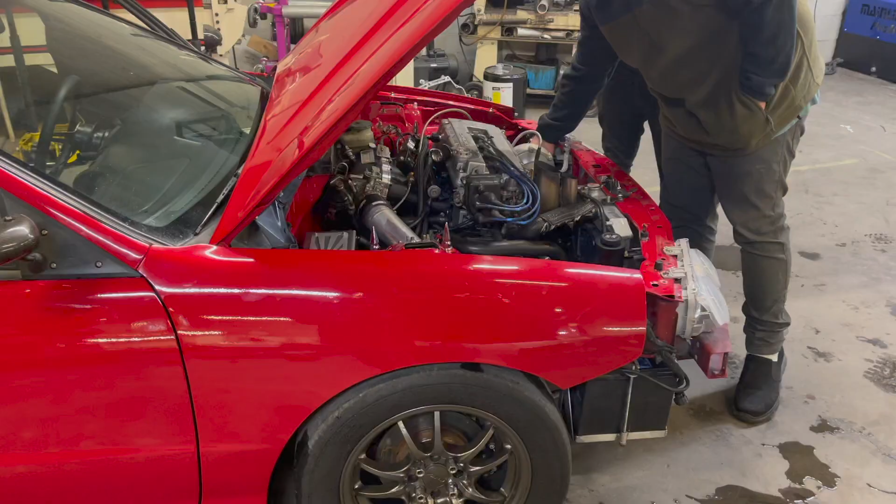All right, dog. All right, Joe. It's all good. It's all good.

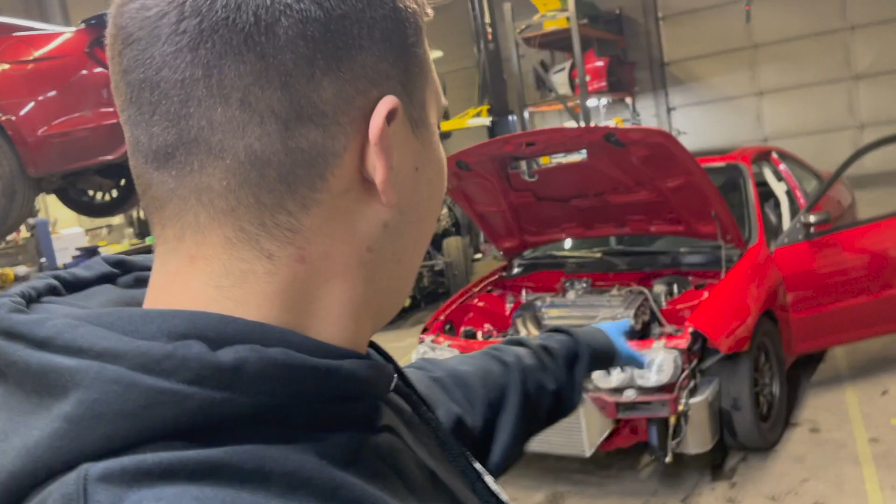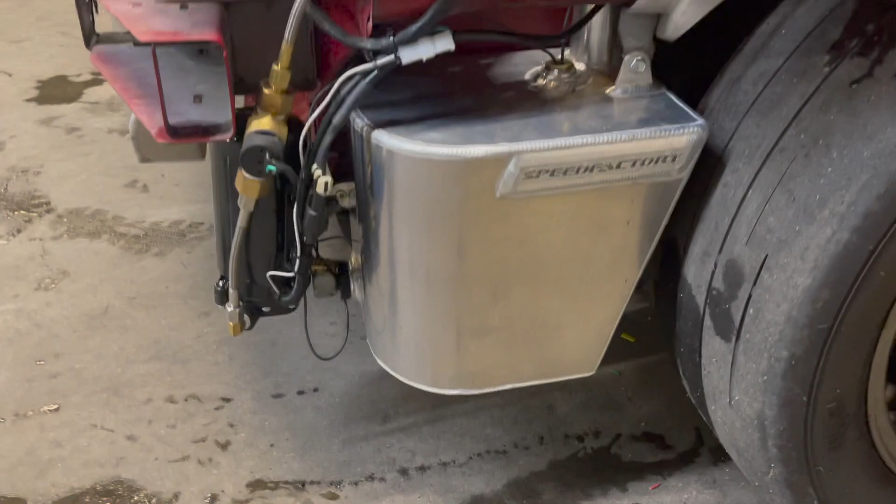Okay, cool. So, guys, welcome back. Today, we are going to be tuning this. Dan the man right there. We're going to give it all the sauce and see what she does. So, everything's working. I got everything just kind of installed on it right now. After the dyno session, I'm going to retuck everything, but for the most part, it's just easy access right now.

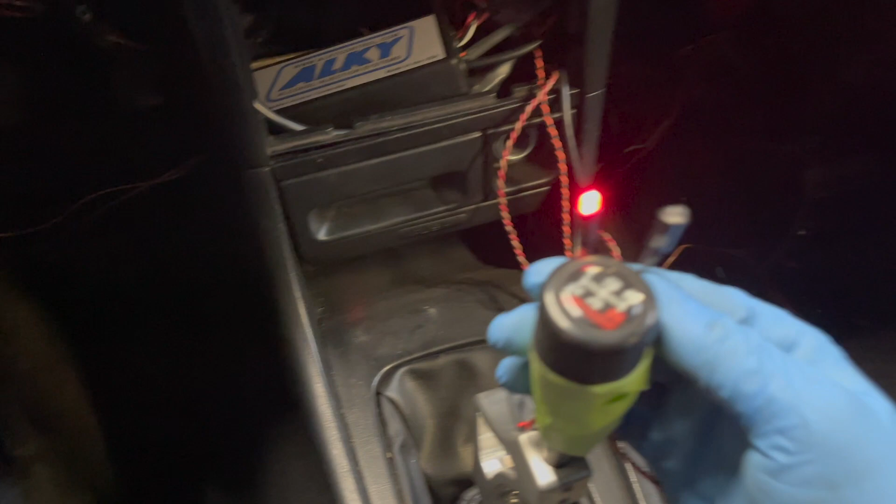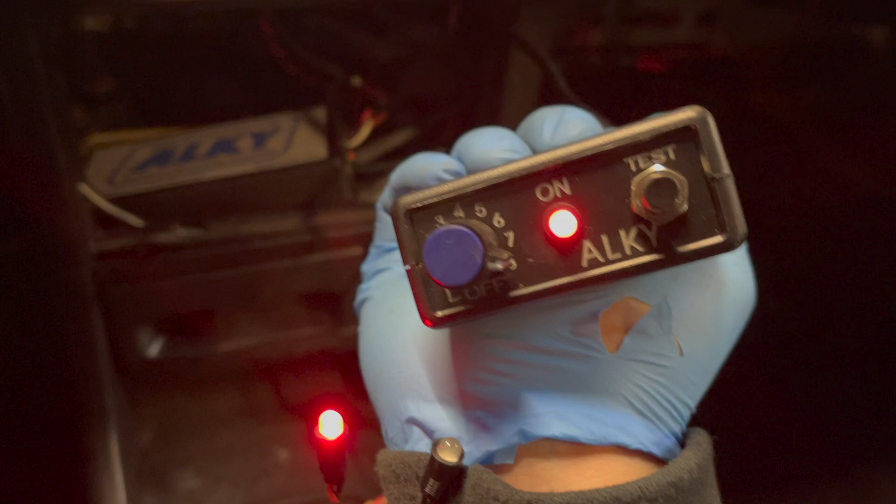So, kind of give you guys a quick little thing. This is the low level sensor light, and then this is the control module. So we have that cranked up to 8. We're gonna go full send. This is the test button to test the meth. It's on, it's armed. So yeah.

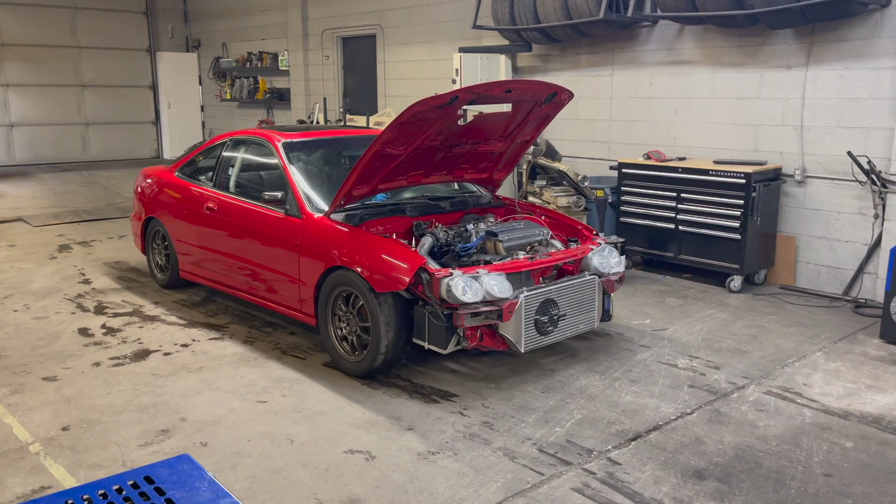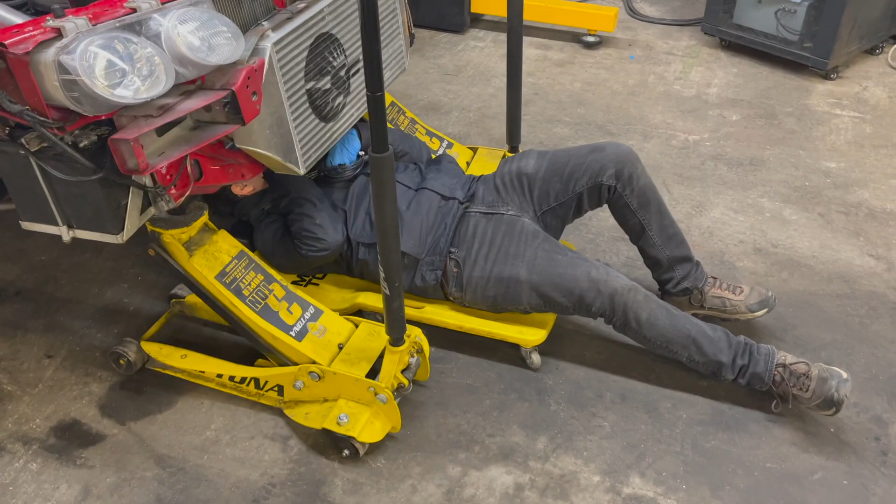So we're hooking it up to the dyno right now. We're gonna max out pump gas before we start doing meth injection. So Dan's installing the knock sensors. That's the best way to push these to the limit, honestly. So he's got all the wiring for the knock sensor. And what the knock sensor does is essentially it just mounts onto the block and it listens. It actually listens for like pinging noises or pre-detonation. So with that, we're going to be able to achieve max horsepower on pump gas.

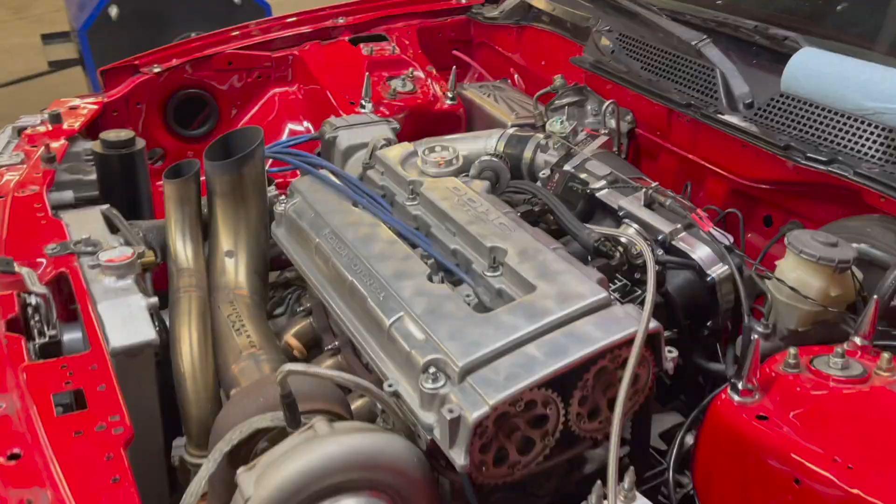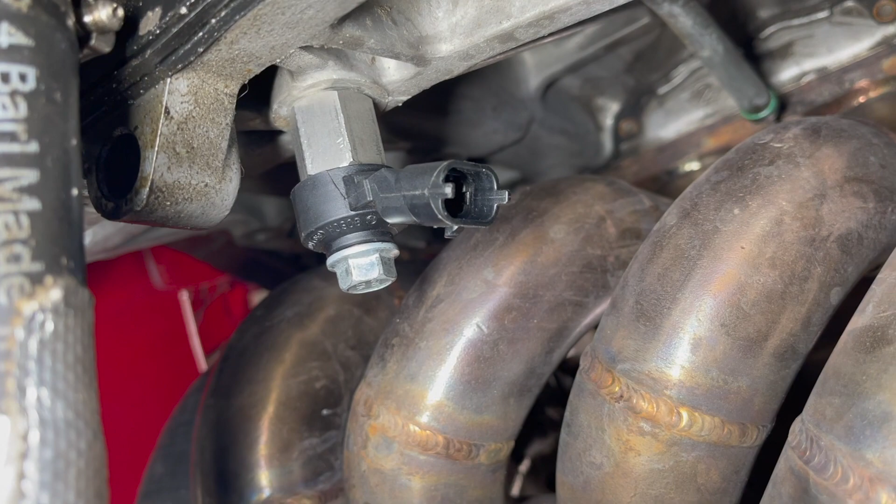Here, let me grab a light. Do you have a light? Yeah, here. This guy right there. Ideally, I'd like to have it closer to the combustion chamber, but being that we don't have any room, there's not much room there. Turbo manifold's in the way. We're going to have to settle for this location here.

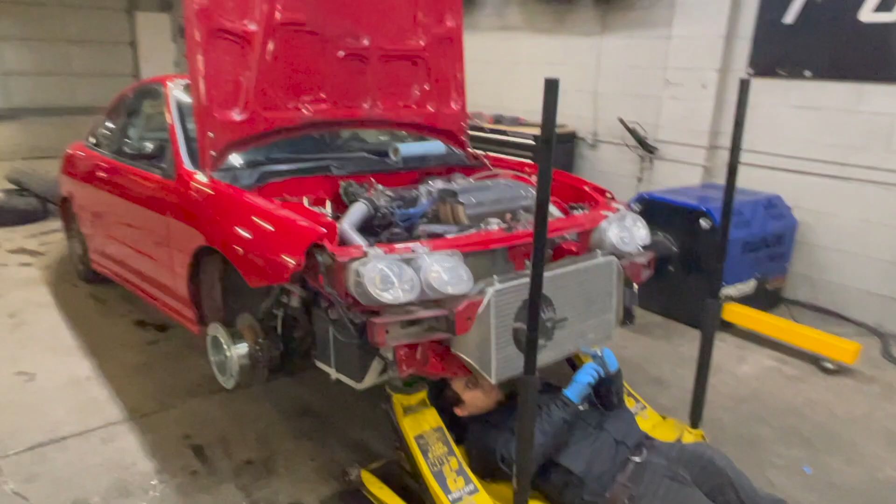I'm not gonna speak on it yet, but I don't know what you're talking about. He's got something in the making, so he's gonna be the next new James out here. You can't leak that information. We can't leak it yet, but yeah. So we'll probably see some videos on his car once we start putting it together. But he's got a really cool build coming up. Essentially, the very similar engine. Getting it bored and sleeved right now, full head package, turbo tough rods, all the good stuff.

You're reckless, dude. No freaking Harbor Freight jacks.

So I'm gonna go ahead and start adapting the pods to the car. So what's your guesses on power? Our goal is just to make over 600 on pump gas. That's our goal. You know, it's not really essentially a high peak horsepower because we know we have a lot of limiting factors. So small turbo, that's it. Other than that though, this engine was built to handle 800 just fine.

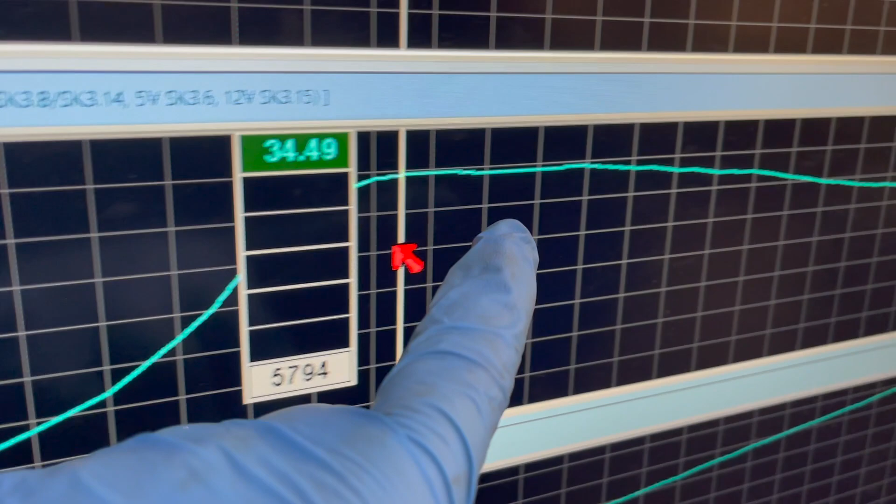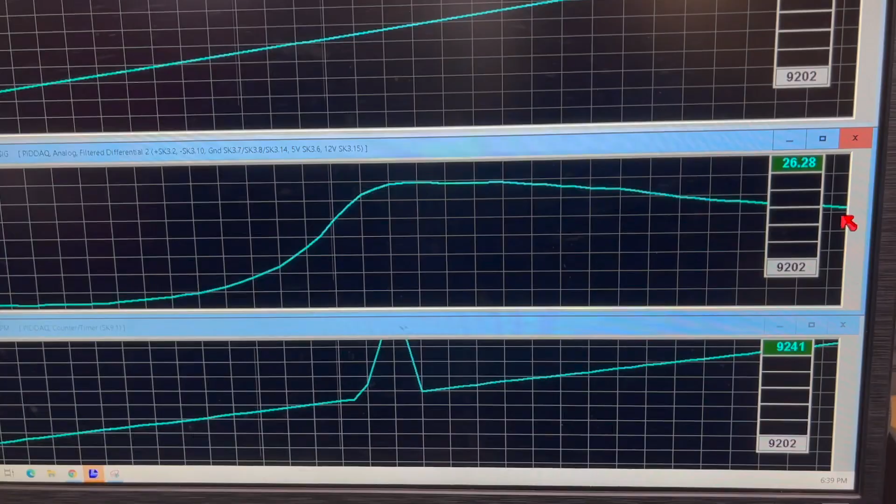Show them the old boost curve. So that's nearly 100% boost control duty cycle. So this is the old data logs off of this car. So peak boost, here, 34.5 peak boost at 5,800 RPM. And that's a 58. And up top, it would go all the way down to 26. So if you look at the shape of the actual boost curve, it just couldn't hold boost anymore. Just really choking out. Probably a lot of exhaust manifold back pressure there, just not letting it breathe.

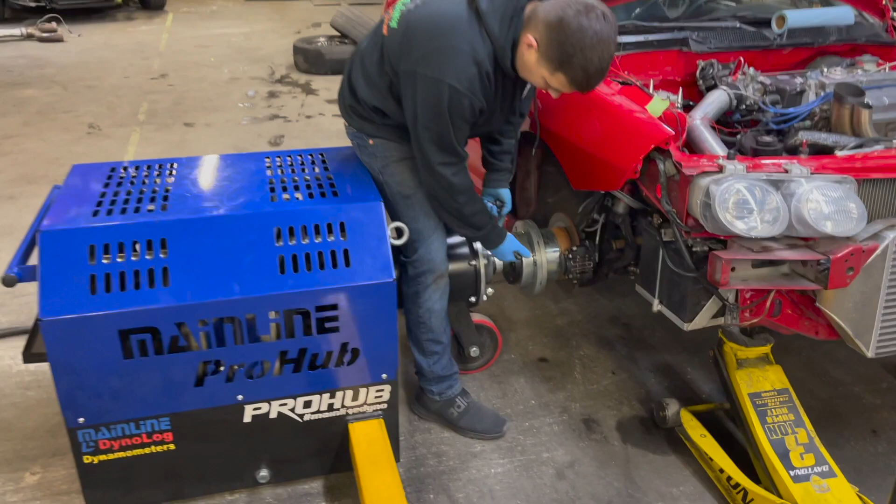So guys, these are Mainline ProHub dynos. These are awesome. The nice part about tuning with these is that there's no wheel slippage, which is great because then we can max out peak horsepower. That's with any platform, any Camaro, any high horsepower vehicle out there. These are rated for 3,000 horsepower. So we haven't had nothing come close to that, but it's good to have the insurance, you know what I mean? The pods, they're just little hub adapters. You can get these for 5 lug, 4 lug.

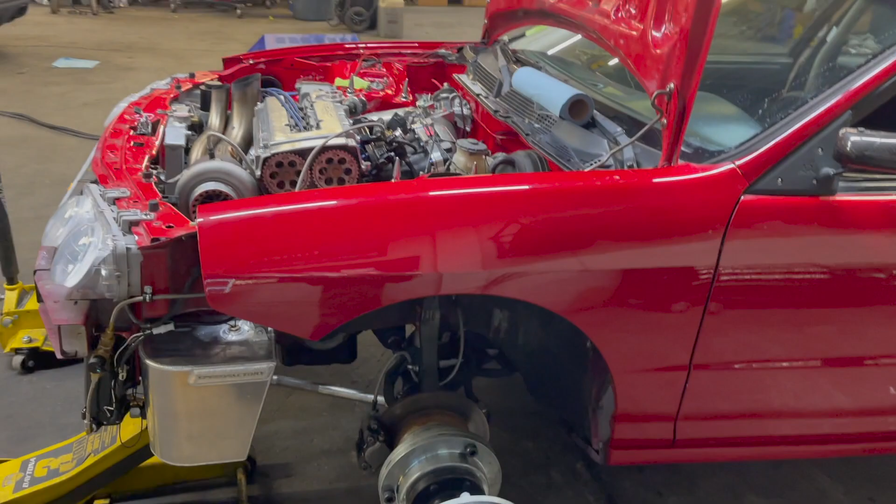This is my new up pipe for 2022. Y'all don't even know. Here, let me show them why we're doing it. Okay. Hold on, I'm gonna take it off.

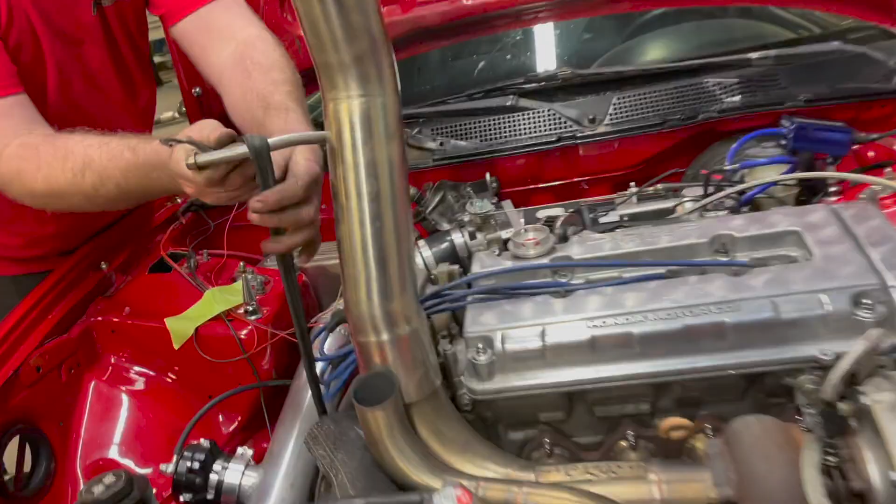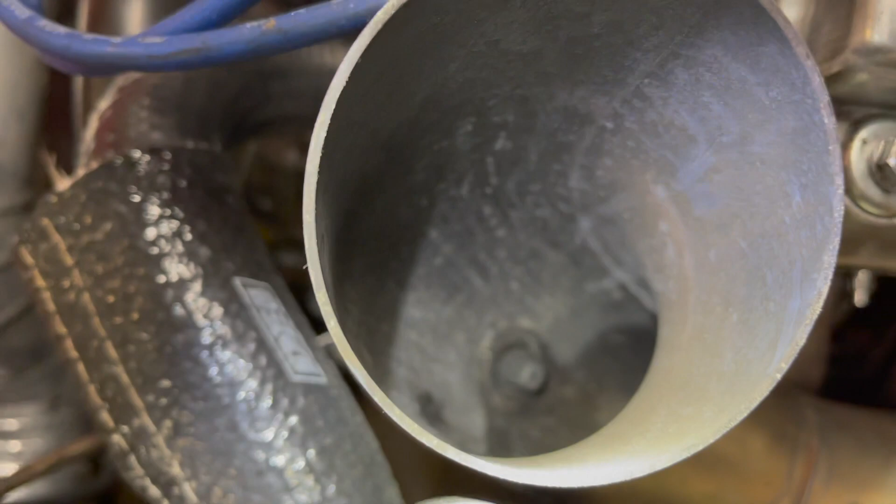Check this out, guys. One issue we have with guys running open up pipes and trying to get wideband O2 readings is the O2 sensor is way too close to the outlet of the pipe. And what happens is under very low speeds where there's very low airspeed in the up pipe, fresh air can go in and contaminate the O2 sensor readings, giving you false readings. So what you'll usually see when you're driving and you're getting turbulence in there is the wideband will start reading pretty lean. And it'll be really inconsistent.

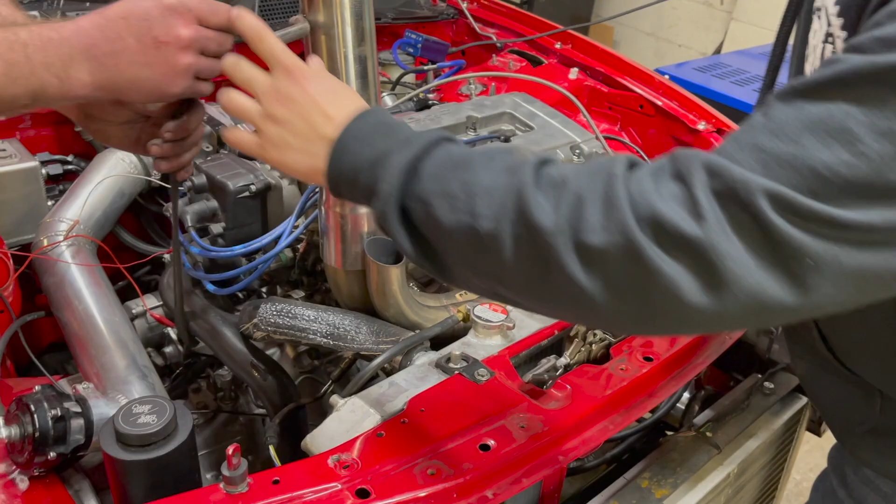So what we're doing is we're installing this up pipe here so that the pipe is really long and it's harder for fresh air to go in there and contaminate our readings. So this is just solely for tuning purposes. Once we finish and we know that the fuel map is dialed in just right, it's gonna come off and then James is gonna be happy. It actually looks like it was made for it. Yeah, look. We should just leave it on there.

Dude, we got the car on the dyno. It's warming up right now. We're about to do some partial throttles, get some fine tuning in. I posted a video on my social media this morning of me doing a fat pull in it on race gas.

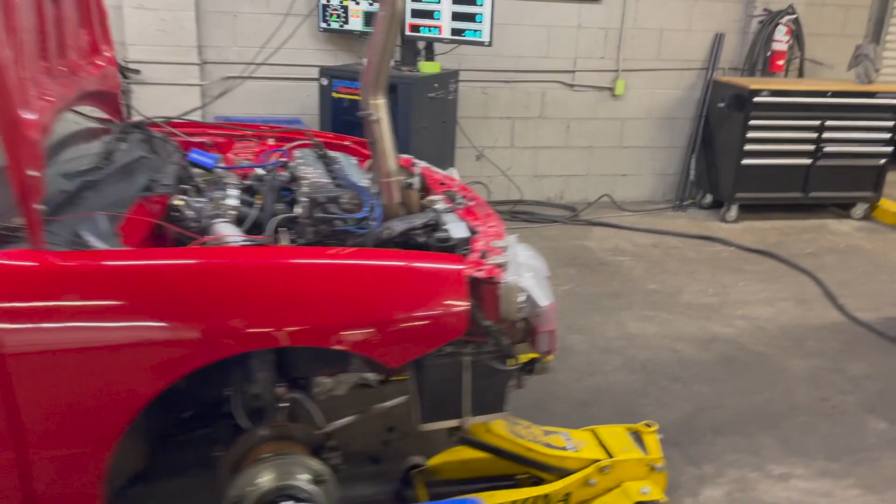I had to step out of the shop. So tonight we're gonna be doing a lot of testing. We're gonna be doing a shit ton of pulls on the dyno. We're gonna be maxing out pump gas. So as you see, Dan hooked up the knock sensors. We're gonna push pump gas to its limits. And then we're gonna do pump gas and meth injection.

Our goal is to make max power. So we're just doing this all for data. Like 100% meth injection on a street car or just a simple setup like mine has never been done before. So we're gonna be testing those things, figuring them out, and hopefully my car lives through tonight, honestly. So I'm interested to see.

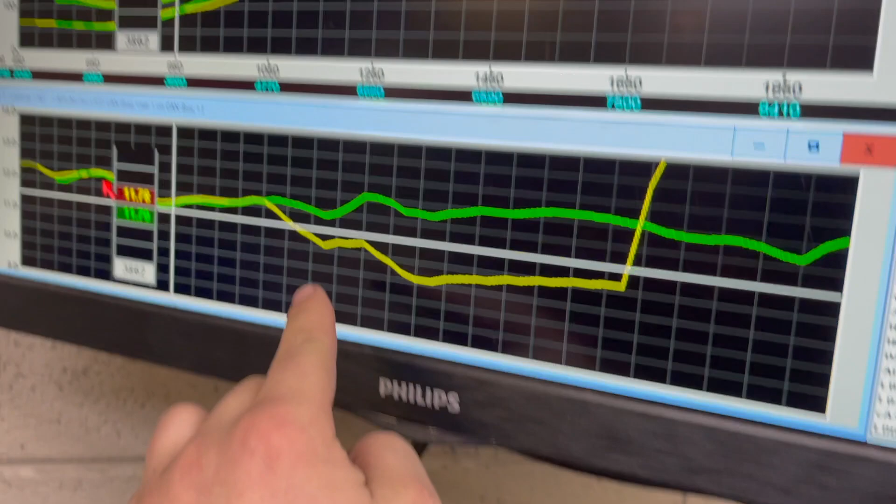Doing some pulls right now on pump gas. We're going through and we're checking all the air fuel ratios. So the meth, you can tell the meth kicked on right here at about 11 PSI. So this is with meth and this is without. So right now we're gonna try and blend that in there, clean up that air fuel ratio. But that's a huge change. It is, that's good.

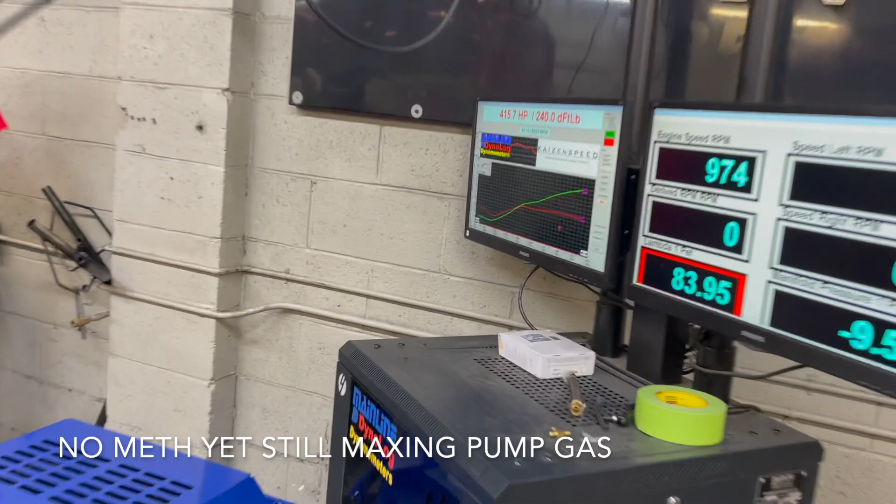That last pull was on pump gas, no meth yet. So he's gonna max out pump gas first, and then we're gonna add meth.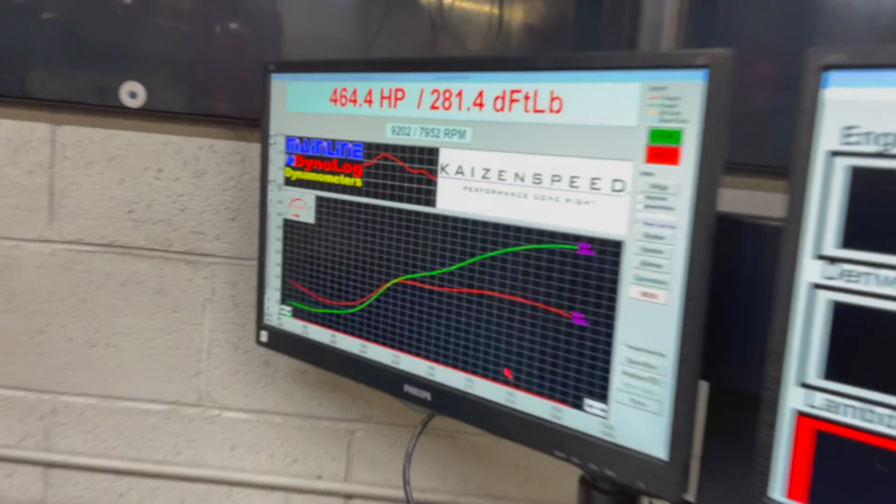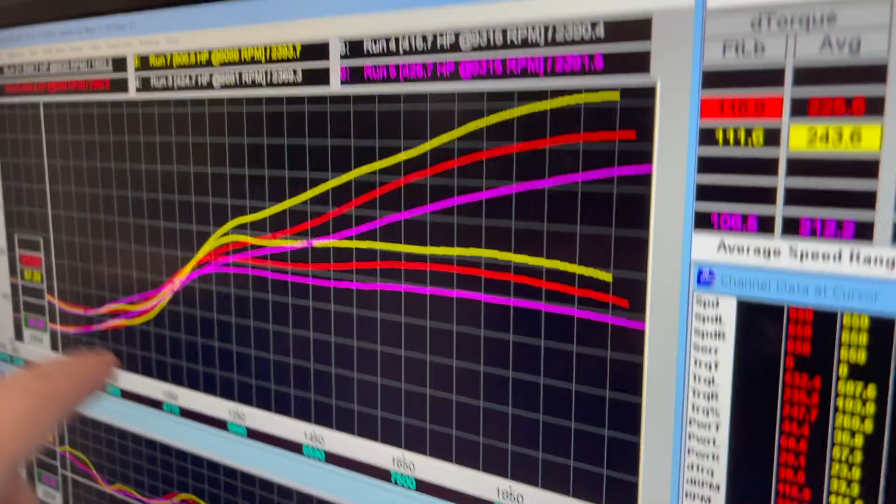Just maxed out pump gas. Well, we didn't really max it out yet. We just are at a safe stopping point. So this is the last pull right here. 508. Made 508 horsepower on pump gas. Let's look at the actual curve. That's freaking crazy. So check that out. Yeah, you want to go ahead and explain the knock monitor to us, Dan?

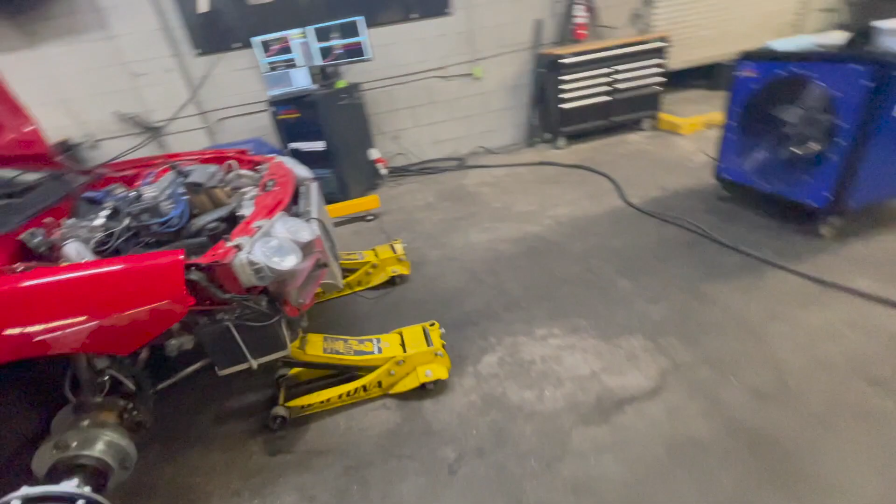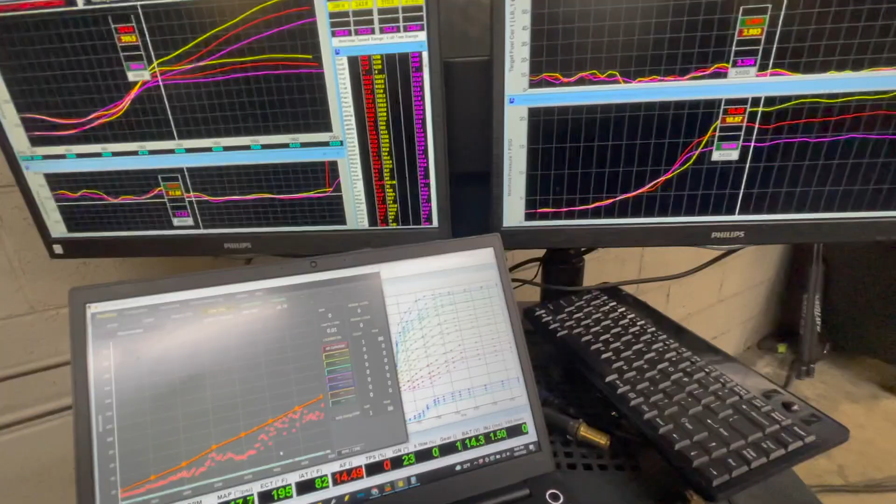Yeah. I have a knock sensor bolted onto this block. Can't really see it, but it's something called the Plex knock monitor. Show you here. This little guy here. So the reason why we want to do that is because the ECUs on these Hondas are probably designed in the late 80s, and their technology isn't really great, meaning one thing they really lack is really good knock control. So when you're really trying to lean on these engines and make most power, you don't really know whether the engine's happy or not. So a really good way to do that is to put a knock sensor on it and listen to the engine.

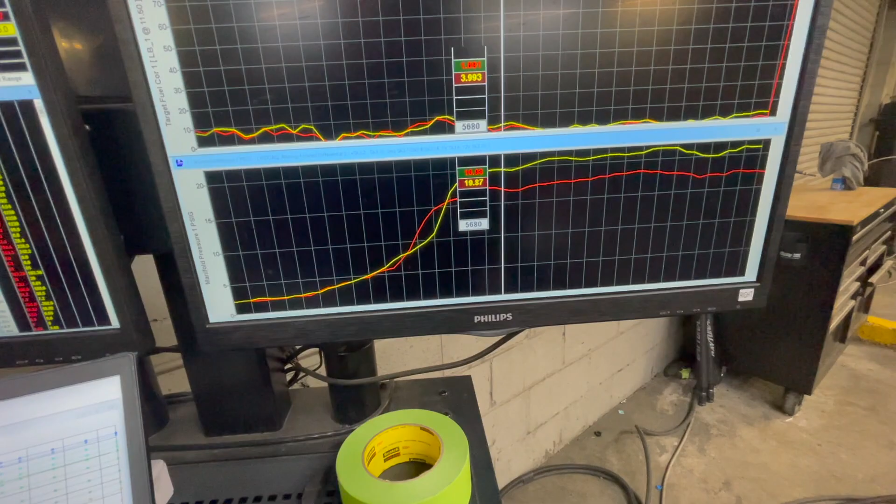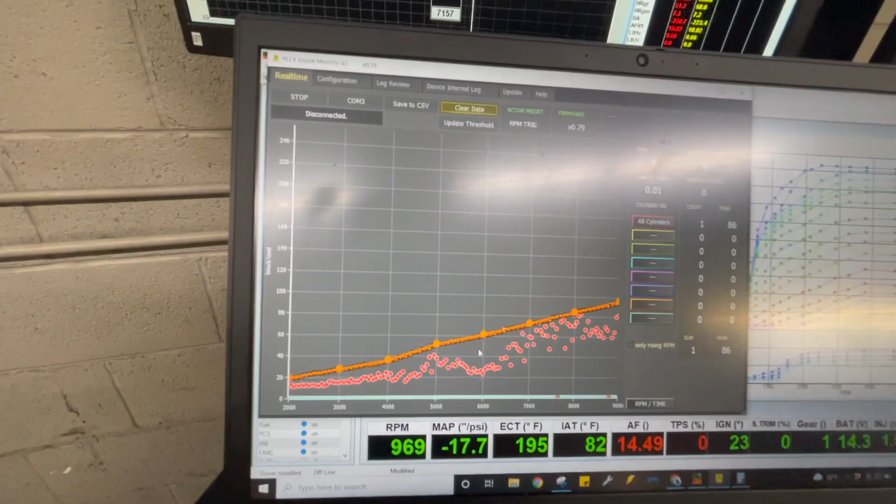Well, I have this software here. Orange line here, I'm highlighting over it. Orange line here is a knock threshold, meaning these dots here represent engine noise. If the engine noise exceeds that knock threshold, we know that the engine's knocking. So although it's not necessarily exceeding our knock threshold, I can see that there's starting to be a little bit more engine noise up top. And we're also making 20 PSI of boost here. Show you. 1 second. So 21 PSI, still not knocking. Everything's nice and safe, but we're at a really good stopping point where we're at now.

So what we're about to do right now is we're gonna turn the meth on, increase the boost, or maybe even leave the boost the same and see if it'll accept more ignition timing and make more power. So okay, that's where we're at.

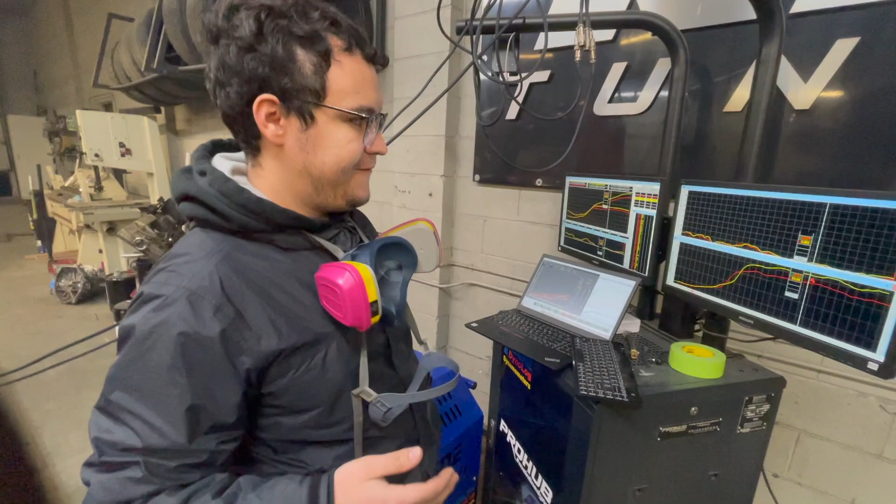Gotcha. Disclaimer, yes, the car will make 500 horsepower on pump gas. We talked earlier, these ECUs are old. They don't have good knock control, meaning if you ever get a bad tank of gas, if you're ever hot lapping the car on a hot day and you don't have the octane there, the engine will knock and you will break something. So this is a controlled environment. We're watching knock, we're keeping a close eye on things. Although this is possible, if you're looking for longevity, it's not something that I would recommend you do. But if you want to send it, we're happy to send it, as long as you're aware of what the repercussions could be.

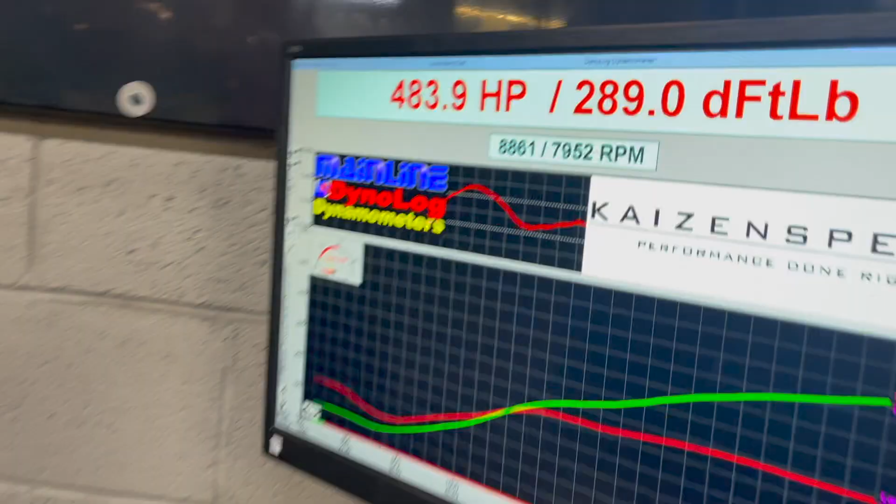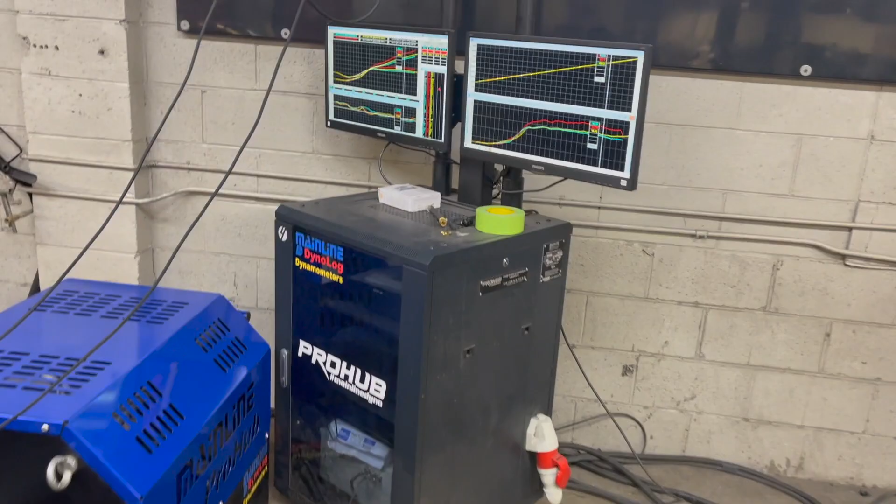Yeah, guys, so we just started pouring some meth in. Dude, that's crazy. Dude, intake temps dropped down to 50 degrees. Dude, it dropped 50 degrees? This is what we've been running. That's what we just did. God damn. The meth kit seems to be working great.

It's kicking on at 11 pounds of boost. It's reading the map signal. And yeah, we're gonna keep on pushing it and see where she stops. So my guess is we're gonna run out of turbo or ignition, one of the two. But hopefully upgrade to a coil on plug kit and then hopefully a bigger turbo and then tranny.

So keep watching, guys. We've already probably done a handful of pulls testing this product. I'm surprised my car isn't broken yet. I put it together, so yeah.

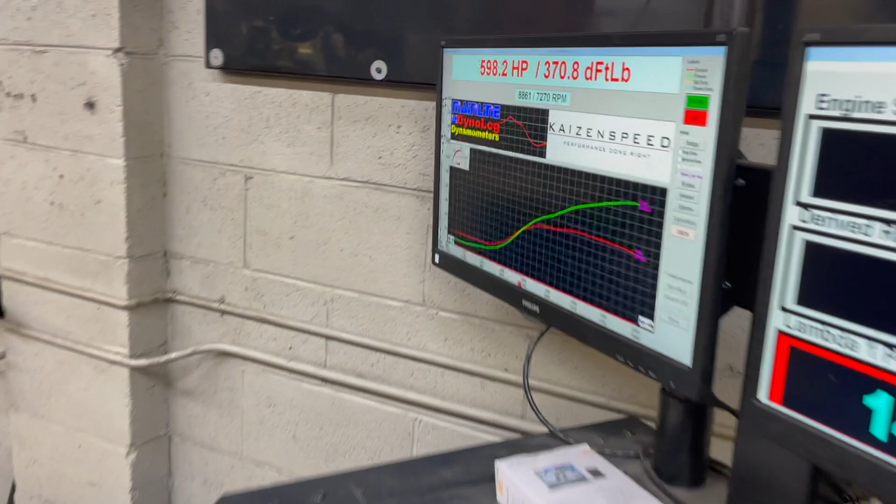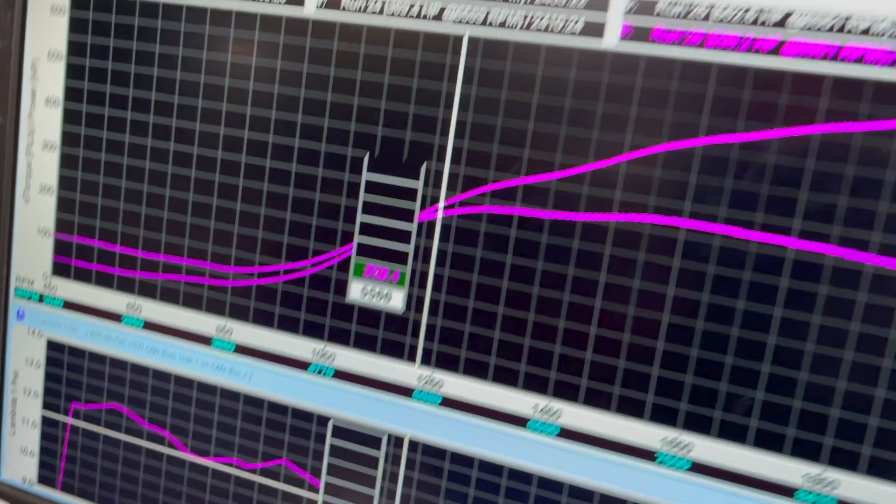We're still on pump gas with methanol injection, 100%. Check this out. So you guys just seen that pull? Look at this power curve. It's still on a mission. So this is less boost than before. So right here, this 35 PSI is coming up, kissing 31-ish, 32-ish.

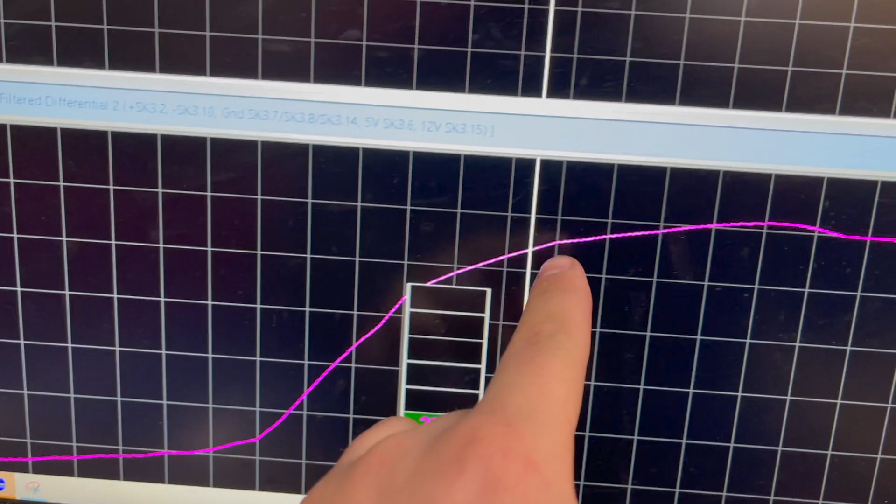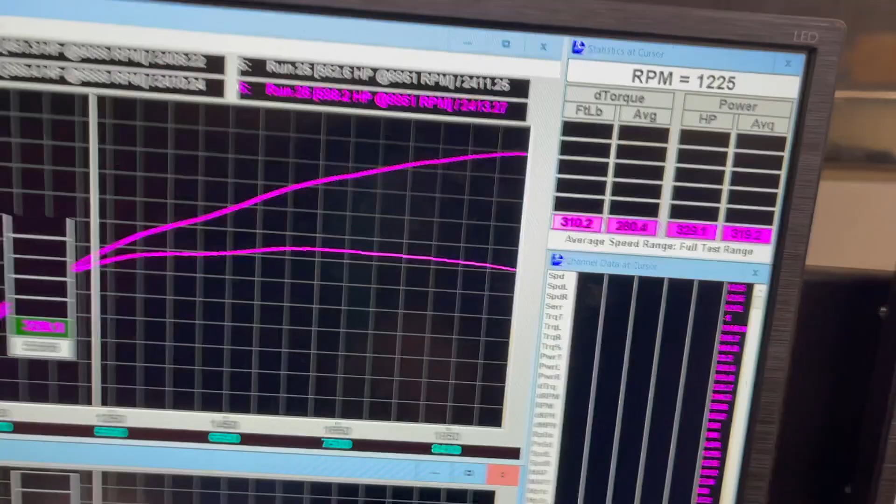But because the turbo is so small, it's choking out. But she's liking it, so that's a good thing. So we're about 598 on pump gas. We want to make more than that, so we're gonna keep on going.

Okay, on that last pull, we started running out of ignition. That's a very common thing on stock Dizzy and stuff like that. Usually 600, 620-ish. They don't like all the boost, so maybe call it. I'm not sure yet. We're still testing a few things, but yeah, I'm honestly really happy with it. 600 horsepower, well 598, but we're still gonna figure it out. So.

Just cracked 600. We're upgrading one of the nozzles to a 10-gallon nozzle, so now we're running 2 10s. On that pull, we were running a 10 and a 5, so we think a little bit more meth will help. So right here, we gotta take it apart. This is where all of our horsepower is coming from, right here. And yeah, well, we're gonna send it again.

So we're just about done. Dan's cleaning up the tune. There's really not much more to gain, to be honest. Our turbo's maxed out. We're getting close to maxing out our ignition setup. We already started running into that earlier today. I went through and I cleaned the spikes on the distributor and we gapped down our plugs more. So that gave us a little bit of relief, but still isn't safe zone.

So we made 615 horsepower on pump gas, B series. And this is an extremely simple setup. CP pistons, Pro 1 cams, 58 turbo. And I'm really happy with it, honestly. That's really cool. So I think in the future, upgrades are definitely gonna be a coil on plug plate and a bigger turbo, and then maybe 700 horsepower pump. I cranked the boost up.

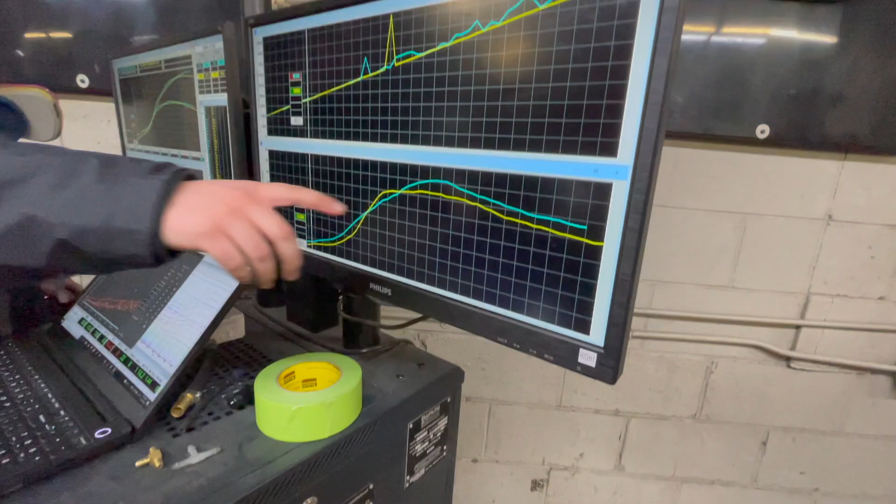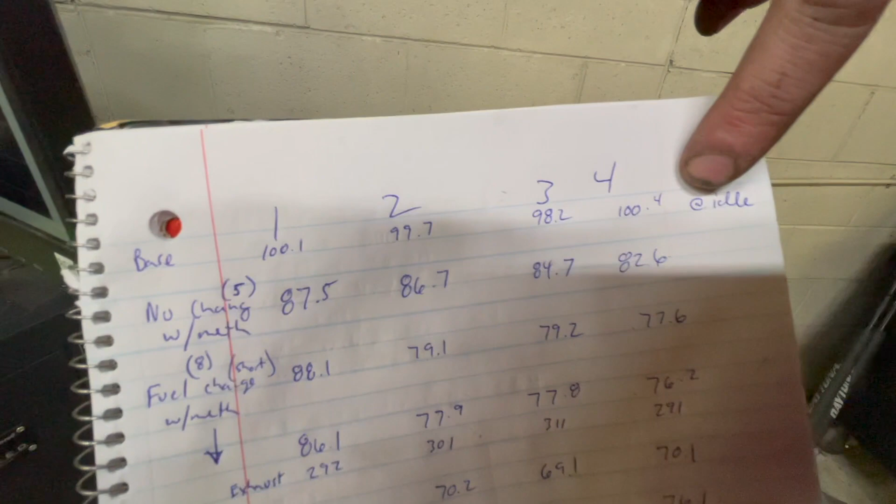Thanks, Dan. I appreciate that. And guys, this is another crazy one. This is baseline temps at the intake right here. This is what we're now reading. Intake on the outside of the intake. That's insane. So basically, that's a 30-degree temperature difference. Colder air means more horsepower.

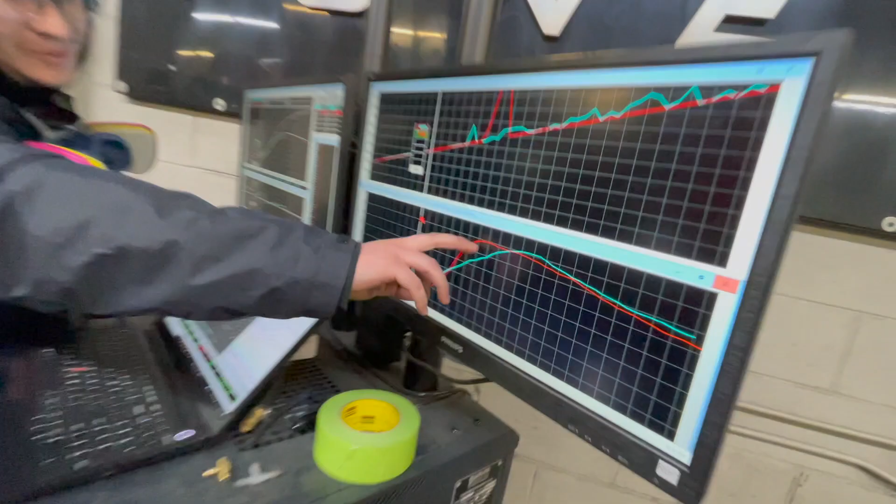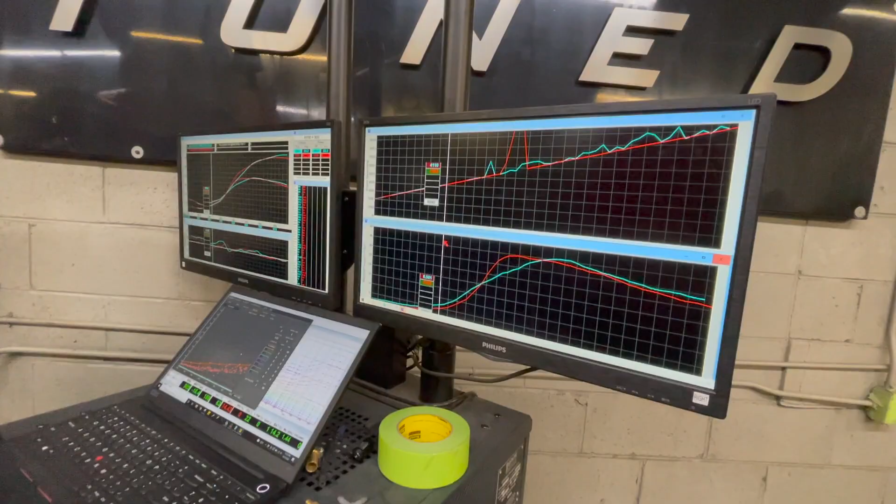Oh, check it. Yeah, boost is identical from last year. Yeah, just different curves. It just ramps in a little. Last year, it ramped in a little harder, so we could probably adjust that. I was trying to help it not misfire by bringing in boost later. Yeah. So if this was a coil on plug plate kit, we would never run into that.

Done? I guess not. The car has more in it. I'm honestly surprised the ignition isn't breaking up yet on pump gas. That's really crazy. Perfect. Air feels perfect. Hey, show them that air fuel. Check this out. Yeah, that's good. Good job, Dan. Be proud of yourself. You just made 622 horsepower on a B series pump gas. I don't think that's ever been done before.

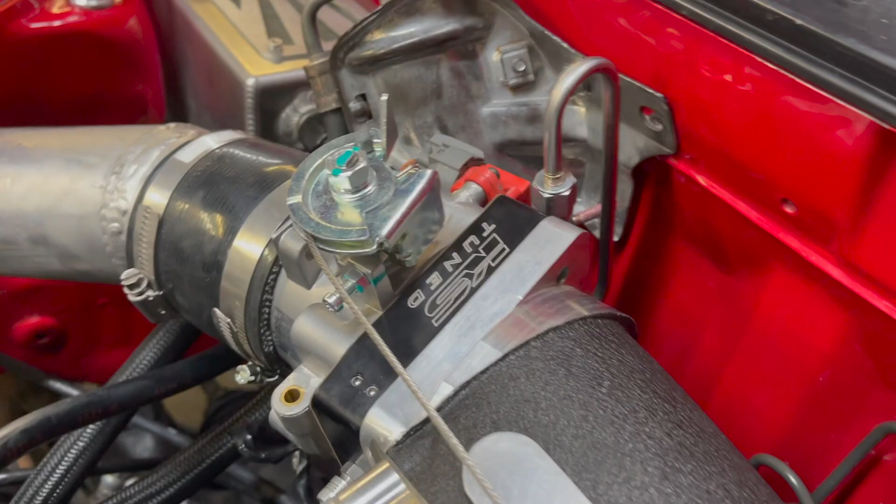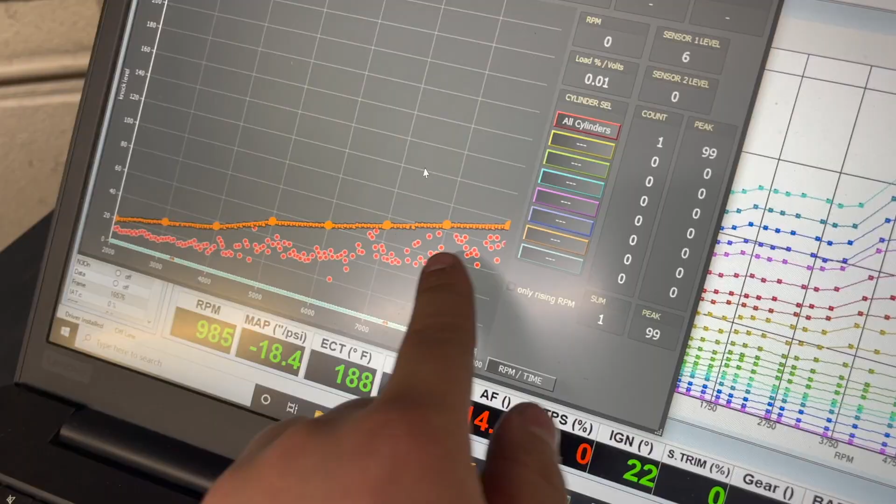Show them the spray plate. Show them the whole system. This, not even knocking. Look at that, guys. No signs of knocking on 622 horsepower. Holy shit. Aside from looking at the knock sensor data, we've been pulling spark plugs and taking all the necessary precautions to make sure that it's fine. So perfectly safe, just as is. I'm happy with that. That's awesome.

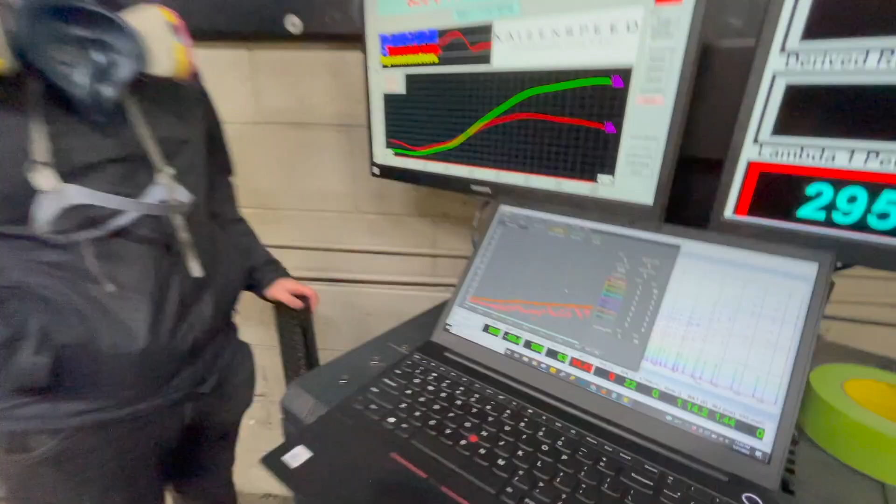So we're gonna take this off the dyno. Appreciate you guys watching. It's been a fun night. It's like almost 12 o'clock at night tonight.